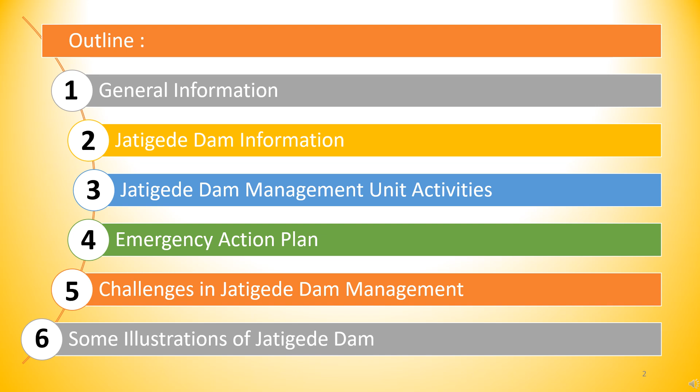1. General information. Indonesia employs integrated water resources management principles and utilizes the River Basin Territory (RBT) conception for administering its water resources, taking into account its archipelagic nature.

The country has 128 river basin territories, categorized into 5 types: international transboundary, provincial transboundary, national strategic, regency transboundary, and single regency/municipality RBTs. The national government oversees the first 3 categories, while provincial authorities manage the 4th, and regency/municipality governments handle the 5th. Cimanuk Cisanggarung, as highlighted on the map, is a provincial transboundary RBT spanning West Java and Central Java provinces, and falls under national government jurisdiction, with the Cimanuk Cisanggarung RBO serving as its implementation unit.

This RBT encompasses 7,776 square kilometers, containing 25 river basins and extending across 7 regencies and 1 municipality.

The 25 river basins in Cimanuk Cisanggarung RBT is illustrated in this schematic diagram. There are 2 major river basins, which are Cimanuk River Basin and Cisanggarung River Basin.

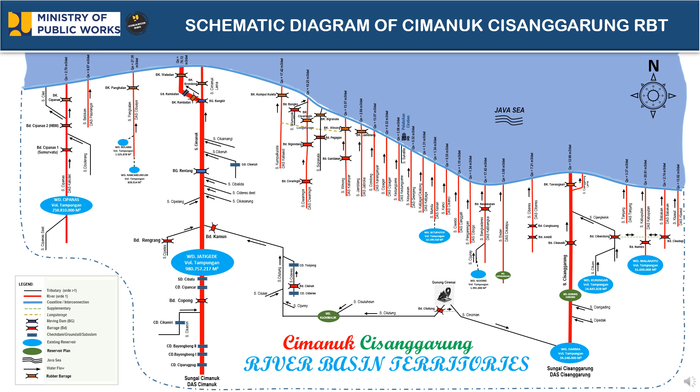3 major dams are indicated as Jatigede Dam, Cipanas, and Kuningan dams. The diagram depicts the Cimanuk River network spanning across the regencies of Garut, Sumedang, Majalengka, and Indramayu.

Several water resource structures are located in the upper reaches of the Cimanuk River, including Copong Barrage, Jatigede Dam, Karedok Dam, and Jatigede Raw Water Intake 1.

The middle section features proposed facilities, Jatigede Raw Water Intake 2. In the lower part of the river system, one can find Rentang Barrage and Bangkir Barrage, with the river ultimately emptying into the Java Sea.

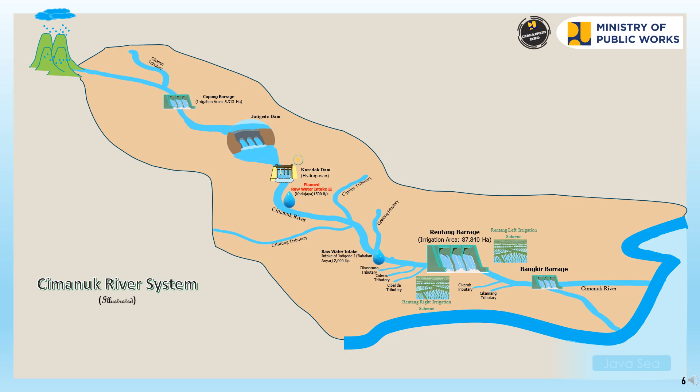2. Jatigede Dam information.

In 1963, the Indonesian government initiated plans for the Jatigede multipurpose dam, conducting various preliminary studies. This process culminated in the development of detailed designs by consultants in 2004. The construction phase officially commenced on November 15, 2007, and continued until 2015. The Jatigede Reservoir's initial filling took place on August 31, 2015. Since 2020, it has been operational, ranking as Indonesia's second largest multipurpose dam, surpassed only by the Jatiluhur Dam.

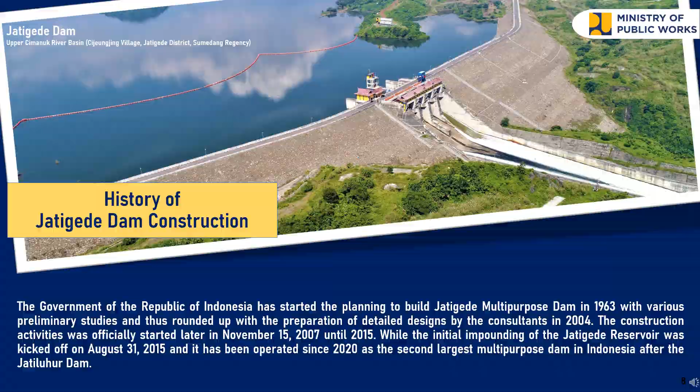The chronology of Jatigede Dam studies commenced with a reconnaissance study in 1963. This was succeeded by a master plan study in 1967, and both pre-feasibility and feasibility studies in 1973. Detailed design work was conducted from 1975 to 1978, followed by a feasibility study review spanning 1981 to 1983. Another round of detailed design took place from 1985 to 1986.

Subsequently, a consolidation study was carried out in 1991. An optimization plan for Jatigede Reservoir construction was developed in 2003. And finally, a review of the detailed design was completed in 2004.

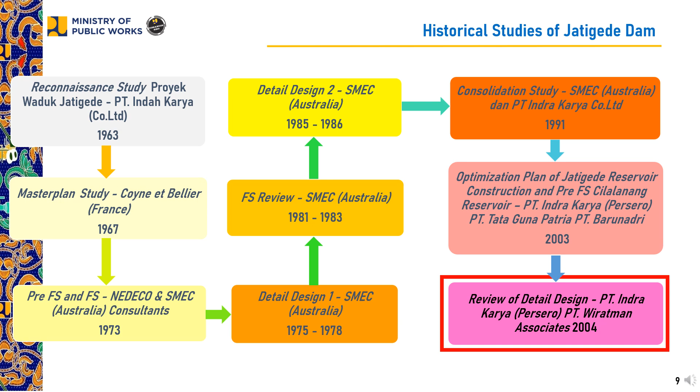After the completion of the study, construction of the Jatigede Dam began. The contract was signed on April 30, 2007, and the construction was officially started on November 15, 2007. On 3 August 2011, the closure of the river was completed, and followed by the installation of Eternity Stone as a symbol of dam construction on October 12, 2011.

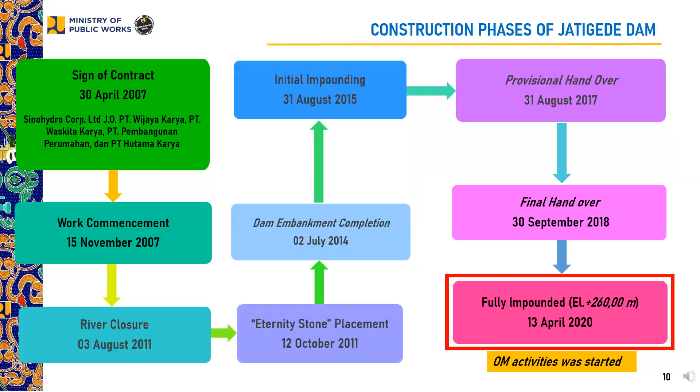In this figure, we can see the positions of the dam, spillway, irrigation outlet, diversion tunnel, power waterway, and grouting gallery, arranged in a clockwise manner. The diversion tunnel and irrigation outlet are located directly beneath the spillway. The grouting gallery features 2 access doors, one on each side of the dam.

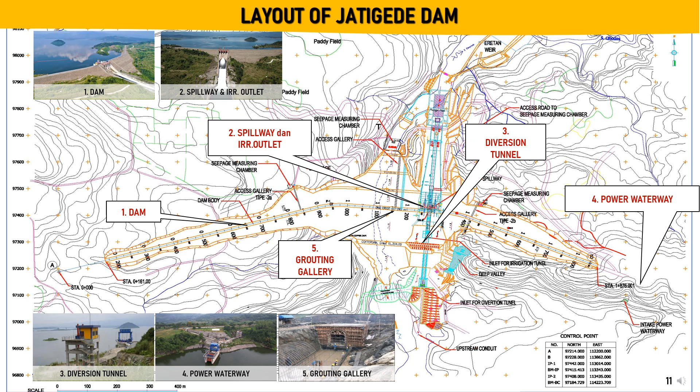Here, we can see satellite imagery of the Jatigede reservoir reveals an inundated area of 3,952 hectares, along with a greenbelt area of 378.5 hectares and several islands within the reservoir. The construction of the Jatigede Dam has submerged 28 villages across 5 districts in Sumedang Regency, leading to the relocation of more than 10,000 households.

Jatigede Dam is a multipurpose dam that provides several benefits, including irrigation for 87,840 hectares, flood control for 14,000 hectares, a raw water supply of 3,500 liters per second, and hydroelectric power generation of 110 megawatts. Additionally, it serves as a tourist area.

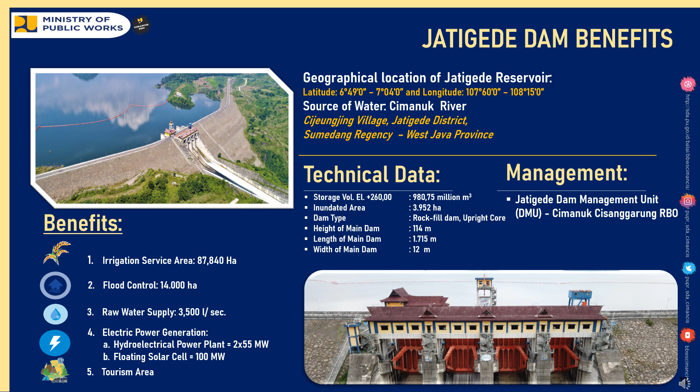The reservoir volume at an elevation of plus 260 meters is 980.75 million cubic meters, with a reservoir area of 3,952 hectares. Jatigede Dam is classified as a rock-filled dam featuring a watertight vertical core. Its dimensions include a height of 114 meters, a length of 1,715 meters, and a peak width of 12 meters.

Let's dive into the benefits of Jatigede Dam. First, for Rentang irrigation area. The Rentang irrigation area has been developed since the Dutch colonial era, with its primary water source being the Cimanuk River, which is now regulated by the Jatigede Dam.

This irrigation area spans 3 regencies, Majalengka, Cirebon, and Indramayu, covering a total area of 87,840 hectares. It is the second largest irrigation area nationally, following the Jatiluhur irrigation area.

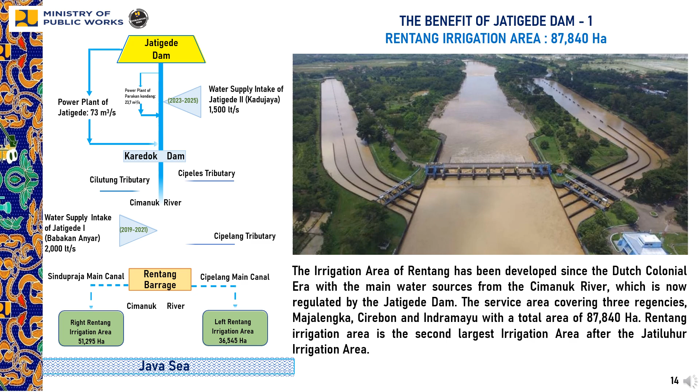Benefits of Jatigede Dam for flood control.

In Garut Regency, a significant flash flood occurred in 2016, similar to the one in 2022, but much more severe. At the Cipasang water level station, located upstream of the Jatigede reservoir, the recorded discharge reached 1,161.82 cubic meters per second.

Before the floodwater from Garut entered the reservoir, the water level of Jatigede was at plus 250.71 meter. Following the influx of floodwater, the reservoir's water level increased by 0.58 meter, equivalent to an additional volume of 19.6 million cubic meters.

During this event, the Jatigede Dam released water at a discharge rate of 324.43 cubic meters per second for a duration of 10 hours, and 143.94 cubic meters per second for 24 hours.

As a result, the dam mitigated the flooding impact downstream by 83.04%. The flood reserve capacity of the Jatigede Dam is 155.6 million cubic meters, calculated from a water elevation of plus 258 meter to plus 262 meter.

The damage caused by the flash floods in Garut Regency is illustrated in the accompanying photos.

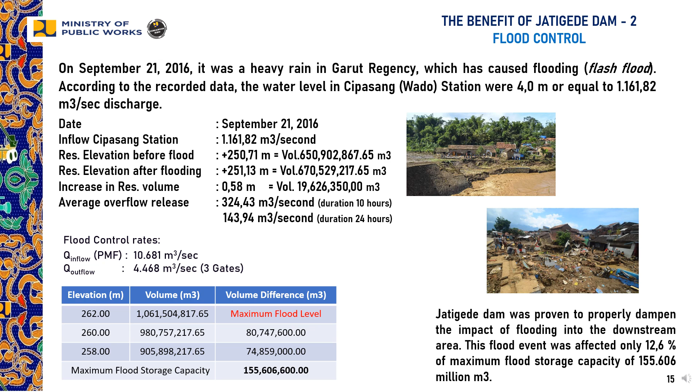Benefits of Jatigede Dam for raw water supply.

The construction of the Jatigede Raw Water Intake 1, with a capacity of 2,000 liters per second, was completed in 2021. The construction of Jatigede Raw Water Intake 2, with a capacity of 1,500 liters per second, is still underway, as the Design, Environmental Impact Assessment (EIA), and Land Acquisition and Resettlement Action Plan (LARAP) documents are being finalized.

The Jatigede Reservoir's raw water supply is expected to benefit approximately 600,000 people, including those in Kertajati Airport and Kertajati Aero City. The left table provides an overview of the distribution plan for Jatigede Raw Water Intake 1, while the right table outlines the distribution plan for Jatigede Raw Water Intake 2.

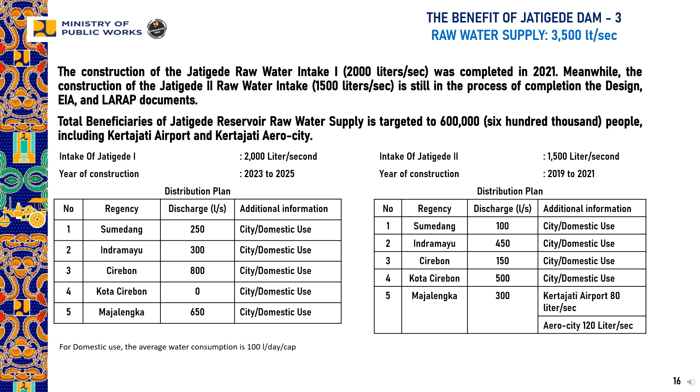Benefits of Jatigede Dam for hydroelectrical power plant.

The Jatigede hydroelectric power plant is a significant national strategic project, designed to generate a total of 110 megawatts (MW) by harnessing water from the Jatigede reservoir.

The construction of the inlet power waterway was completed by the Ministry of Public Works and Housing (MPWH) in 2015. Meanwhile, PLN, a state-owned company, completed the construction of the Headrace Tunnel, Powerhouse, and Karedok Dam in 2024.

The Karedok Dam plays a crucial role in regulating water flow to the downstream area, primarily for irrigation in the Rentang irrigation area. It is essential to manage and adjust water levels, especially when the irrigation discharge requirements fall below the generator's design discharge capacity.

The discharge requirement for peak hours is set at 73 cubic meters per second.

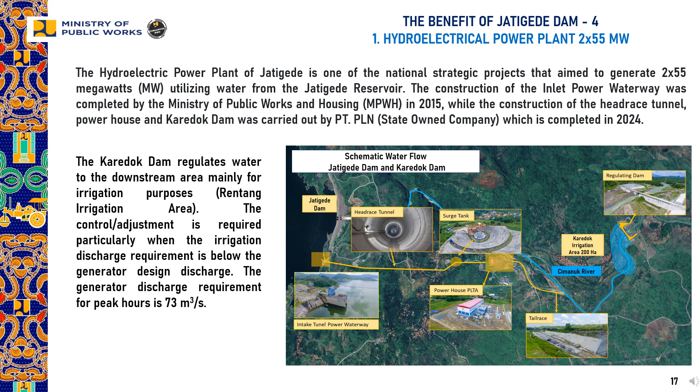Benefits of Jatigede Dam for floating solar panel.

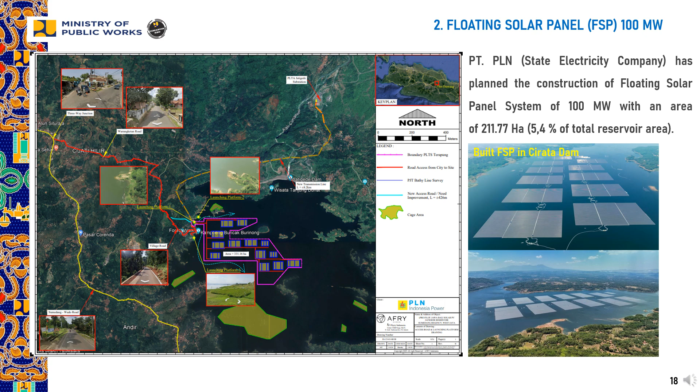PLN, State Electricity Company, has planned to construct a 100 megawatt floating solar panel system, covering an area of 211.77 hectares, which is 5.4% of the total reservoir area. The picture on the right gives an illustration of a built floating solar panel at Cirata Dam.

Benefits of Jatigede Dam for tourism. Jatigede Reservoir also attracts tourism in the surrounding area.

Jatigede Dam Management Unit Activities.

In this segment, we will examine the activities of the Jatigede Dam Management Unit. These activities can be categorized into 4 main areas: operation, surveillance, maintenance, and safeguarding.

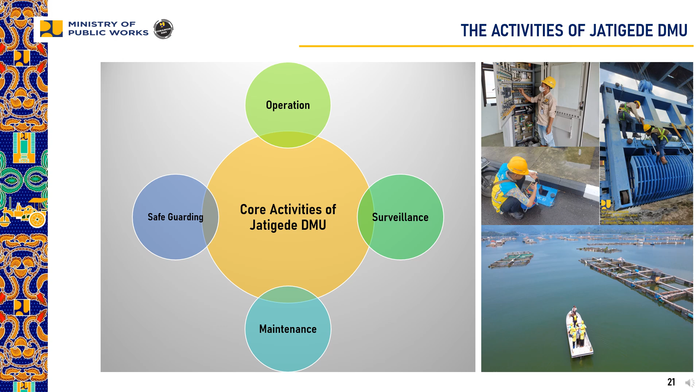The surveillance staff comprises the largest segment of the overall team, as many instruments require regular monitoring.

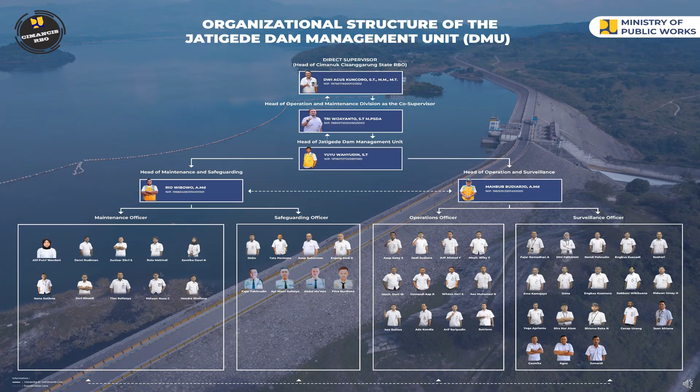The operations team is responsible for several key activities, including: 1. Operating the reservoir gates under normal conditions. 2. Operating the reservoir gates during flood conditions. 3. Operating the reservoir gates in emergency situations.

4. Monitoring and inspecting infrastructure to assess its condition, maintenance needs, repair requirements, and associated costs. 5. Data input. 6. Preparing reports. 7. Documenting procedures and activities. These tasks are essential for ensuring effective management and safety in the dam's operations.

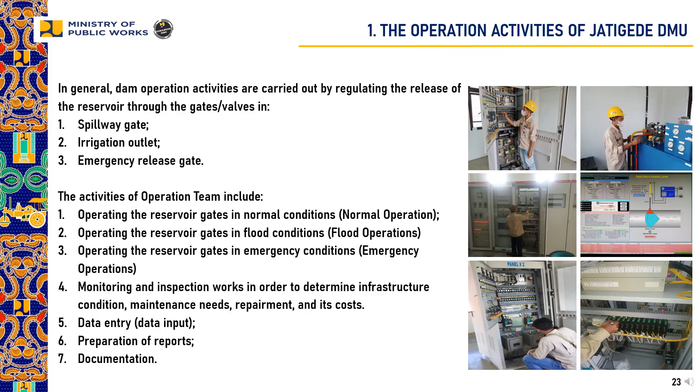On this slide you can see the control room and SCADA system. SCADA is used to operate several tools such as gantry crane gates, stop logs, and others.

Objects associated with the Jatigede Dam include the main dam and spillway, power waterway, gantry crane, irrigation outlet, trash rack, and stop log.

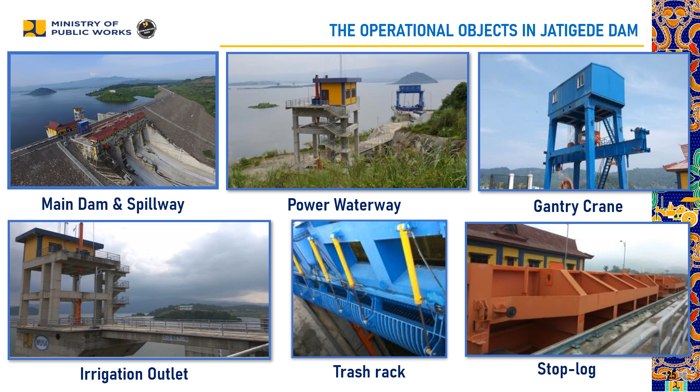We are continuing to dam surveillance activities. Instrument monitoring takes place daily, with instrumentation tools distributed across the downstream areas of both the left and right slopes, as well as within the dam itself, including the management office.

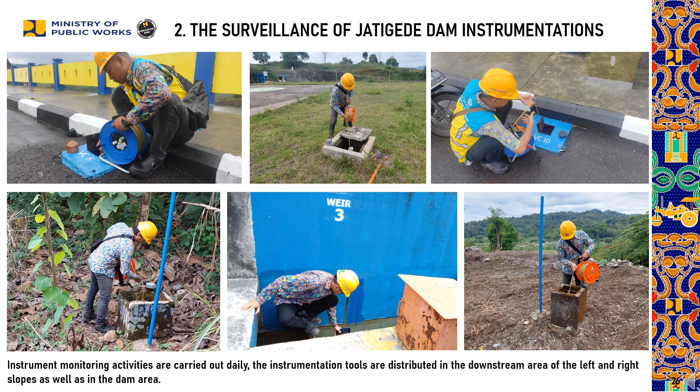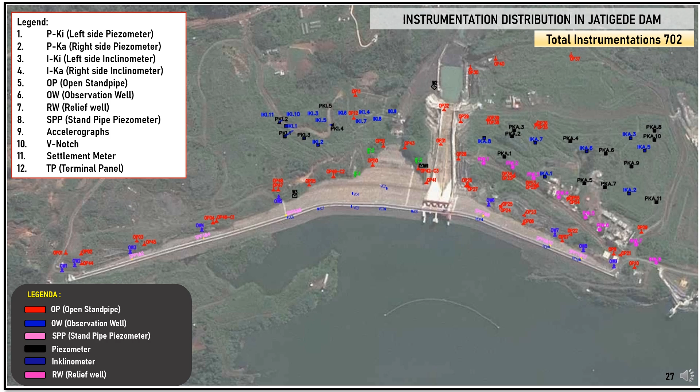This image shows the arrangement of instruments at Jatigede Dam. Vibrating wire piezometers are installed in the waterproof core zone and the dam's foundation, while open standpipe piezometers are positioned downstream of the dam. In total, Jatigede Dam is equipped with 702 instruments.

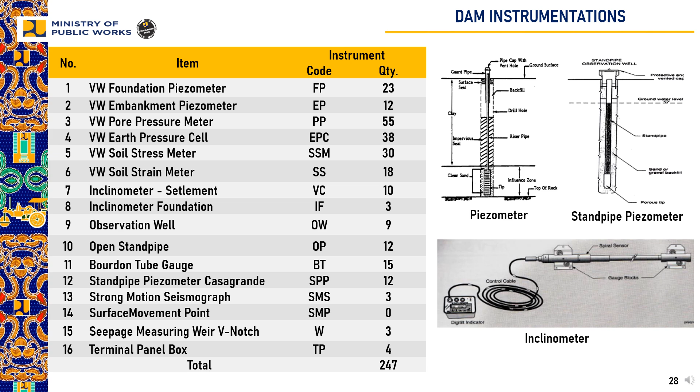The following data shows the instruments placed in the dam section. A total of 247 dam instruments have been installed to observe dam behavior, including piezometer, standpipe piezometer, and inclinometer.

This table lists the 246 instruments on the spillway, which include a piezometer, a water level gauge, and an atmosphere pressure sensor.

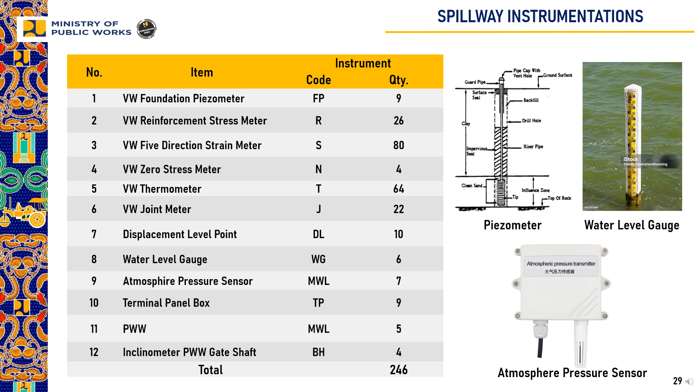On the downstream slope of the dam, 213 instruments have been installed, including open standpipes, standpipe piezometers, and inclinometers.

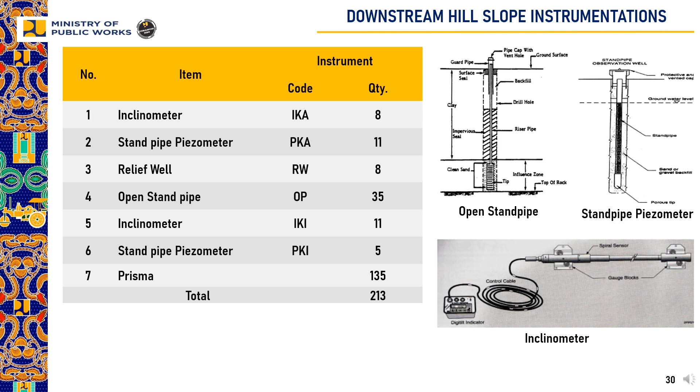Beside the instrumentations in the dam area, there were also 7 instruments placed in the dam management office, including rain gauges, anemometer, and barometer.

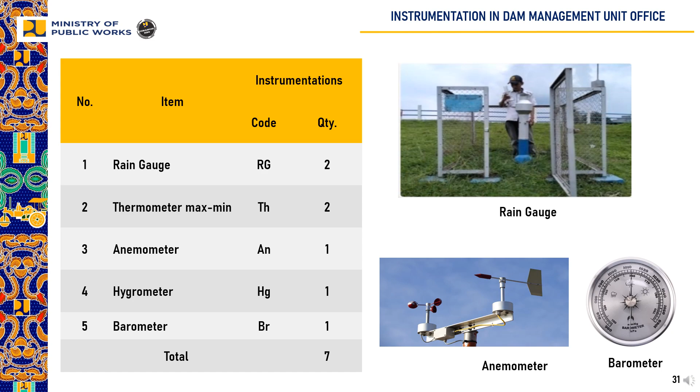Maintenance activities in Jatigede Dam. One example of routine maintenance activities is the grass-cutting work on the Jatigede Dam site. The work aims, among others, to improve visibility, reduce fire risks, and maintain the dam's aesthetic condition.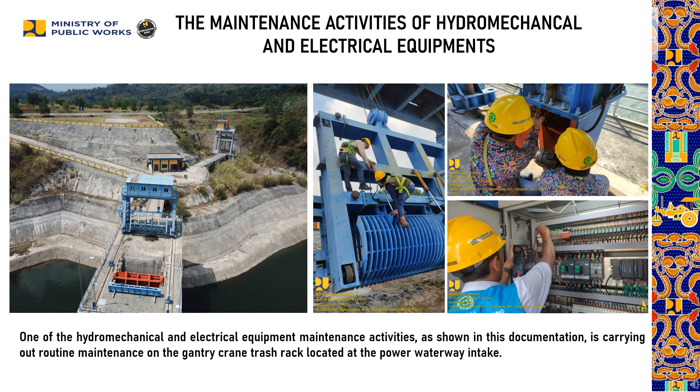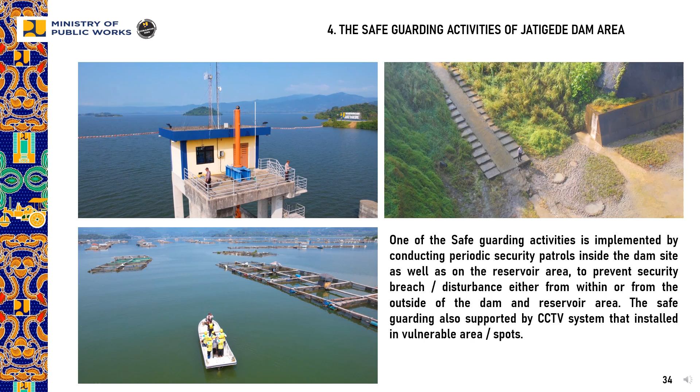The final core activity is the safeguarding of both the dam and the reservoir areas. One of the key safeguarding measures involves conducting regular security patrols both at the dam site and in the reservoir area. These patrols are essential to prevent any security breaches or disturbances, whether they originate from within the dam and reservoir areas or from external sources.

4. Emergency Action Plan. The emergency detection and response procedure is a key component of the dam emergency action plan. The purpose of emergency detection is to identify potential dam failures. This identification relies on both instrument readings and external factors, such as natural disasters or acts of sabotage.

When indications of dam failure are present, such as seepage, landslides, structural failure, or overtopping, an emergency condition is declared. This triggers a series of emergency response procedures, which are categorized into 3 levels: precaution, caution, and alert. The dam management unit will implement the appropriate procedures based on the identified alert level.

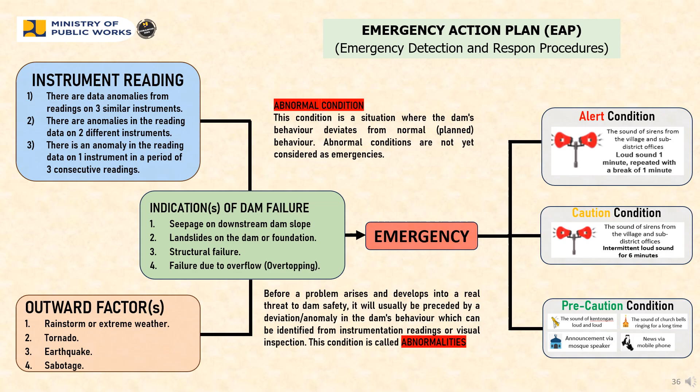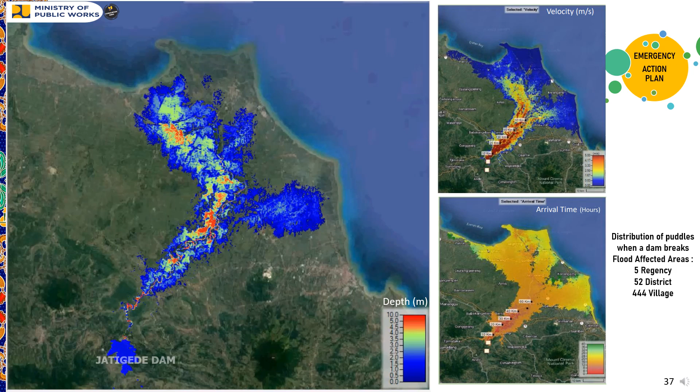In the event of a dam break, the areas affected by flooding will include 5 regencies, 52 districts, and 444 villages. The left figure illustrates the simulation of flood depth resulting from the dam break, with red indicating depths between 5 to 10 meters.

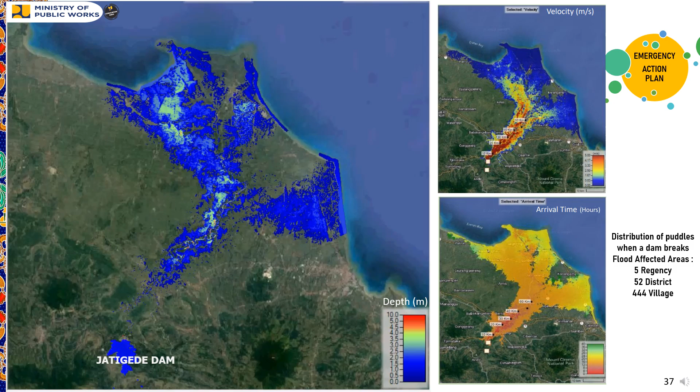The upper right figure displays flood velocity, where red signifies speeds of 4 to 5 meters per second, while the lower right figure indicates the arrival time of the flood to the affected areas, with red representing an arrival time of less than 4 hours.

5. Challenges in Jatigede Dam Management. There are 4 points in terms of challenges in Jatigede management. Human resources require training for employees and the number of employees is small. The SCADA system requires a license which has an impact on errors in sensors. For operation and maintenance only 80% of funds are allocated each year.

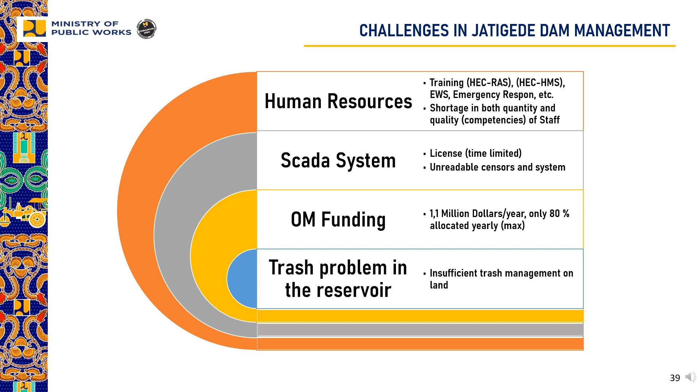These efforts were carried out by the Dam Management Unit in collaboration with the heavy equipment team from Cimanuk-Cisanggarung RBO and other stakeholders.

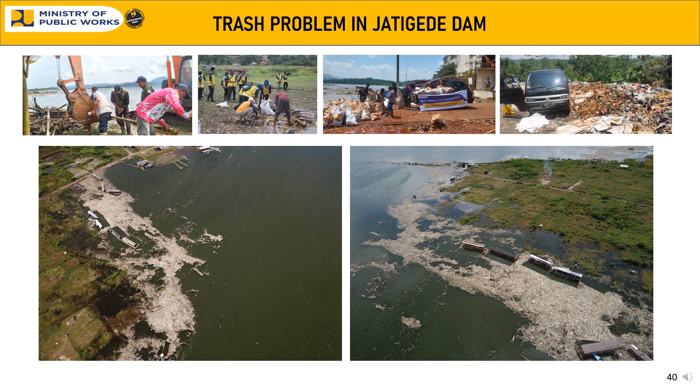The root of the waste problem has been identified as the increasing amount of waste originating from the upper reach urban areas, particularly during the rainy season. When floods occur in the Garut district, debris carried by the floodwaters enters the Jatigede reservoir area.

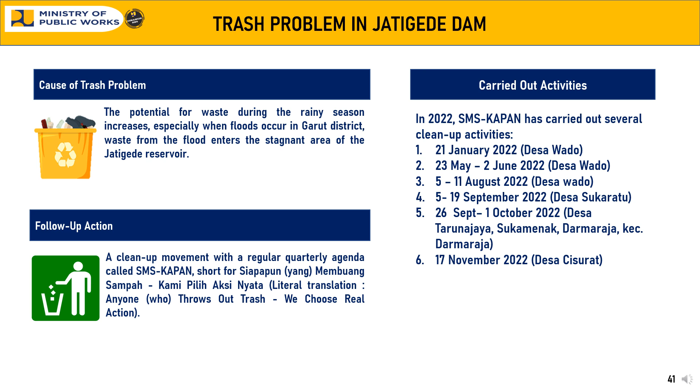To address this issue, a cleanup initiative called SMS-KAPAN, which stands for Anyone Who Throws Out Trash, We Choose Real Action, has been established, with a regular quarterly agenda. Launched in 2022, SMS-KAPAN has been implemented several times to date.

6. Some illustrations of Jatigede Dam. From a downstream view, we can see the Jatigede Dam where water flows out of the outlet.

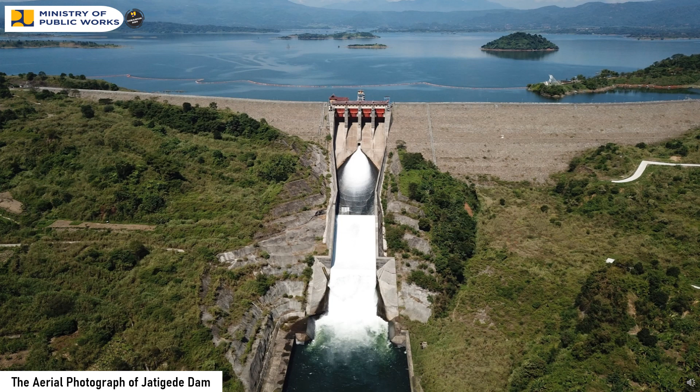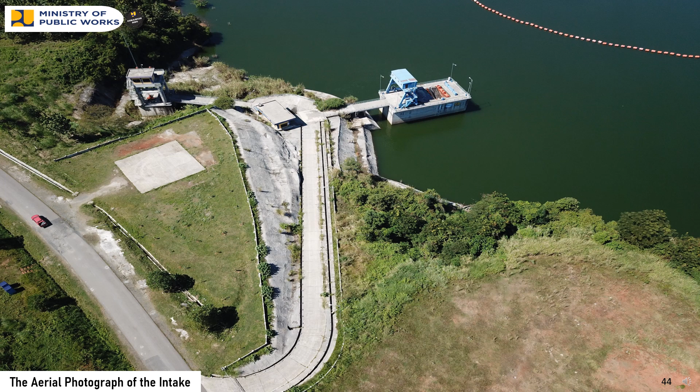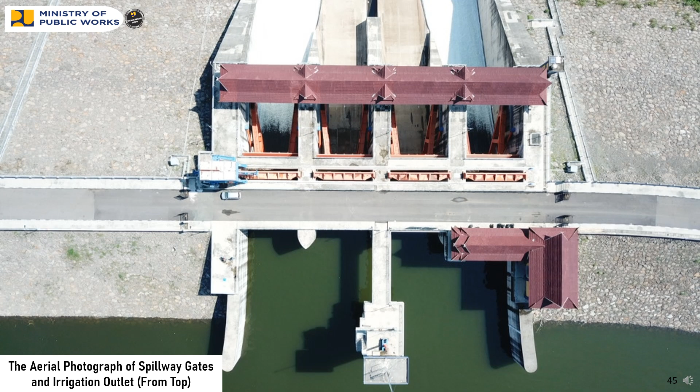This slide features a top-view photo of the spillway gates and irrigation outlet, showing water flowing from the 2 operational gates located on the outer right and outer left sides of the spillway.

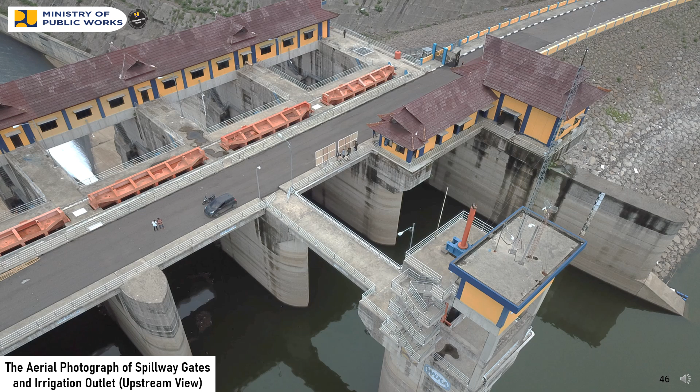The last image is an aerial photograph of the spillway gates and irrigation outlet from an upstream perspective. The irrigation outlet primarily supplies water to the Rentang irrigation area.